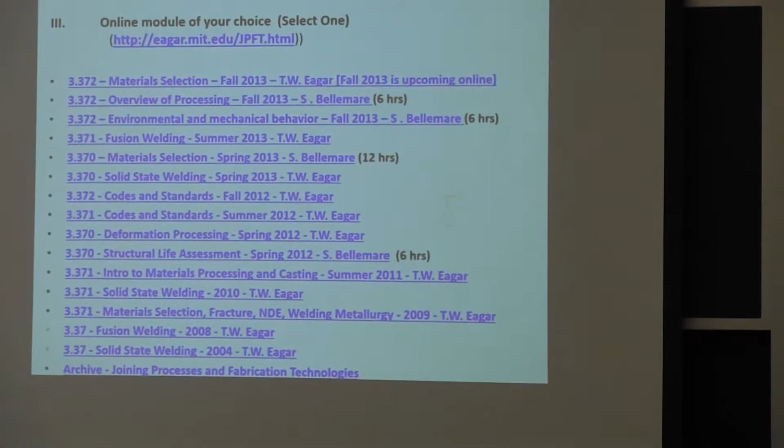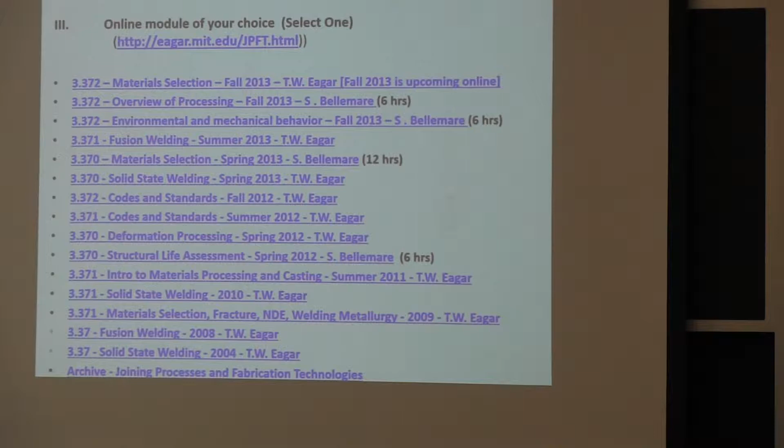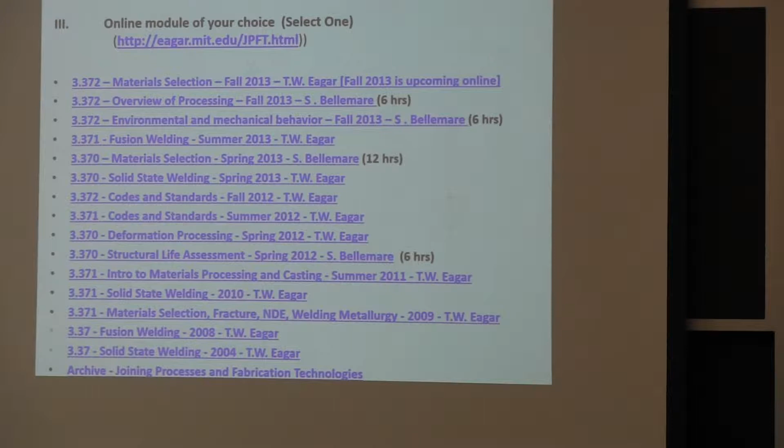I tend to focus more on what is needed as the basics in those lectures, especially the one last fall on environmental and mechanical behavior. I talked about corrosion, which a lot of students in the class really liked because it's not something that's taught so much. It's not cool to talk about corrosion, even though it's very important to practicing engineers.

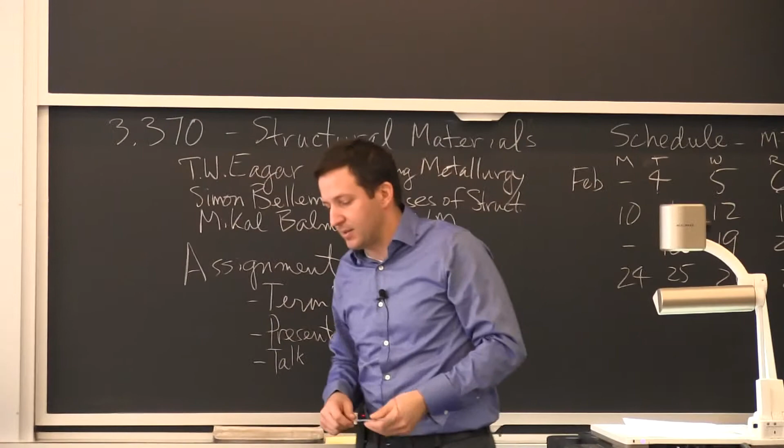And that's an extension of what Professor Eagar was saying about nanomaterials and what is taught in class in terms of going to the thermodynamic equation as opposed to how you actually get something done in terms of engineering. We are trying to bridge that gap a little bit.

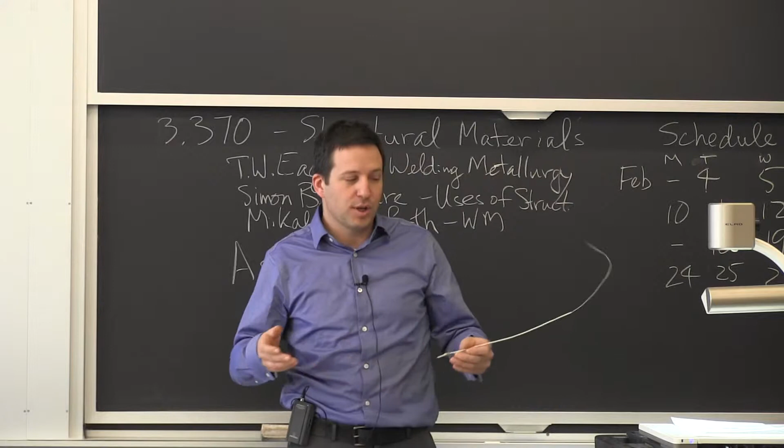A lot of it comes from experience. I have to say the first 6 months I worked for a large consulting company, I wasn't very helpful. By the time I had to turn in the assignment, I had spent so much time just learning a lot of practical stuff. And it's not that there's anything wrong with this.

I mean, I went through the process like you guys. I did a lot of research. I had a lot of basic skills. I had to learn how to apply it - it was still a very broad consulting structural engineering area, but it probably took me a few years before I was really able to answer questions without having to do a bunch of research in the first place.

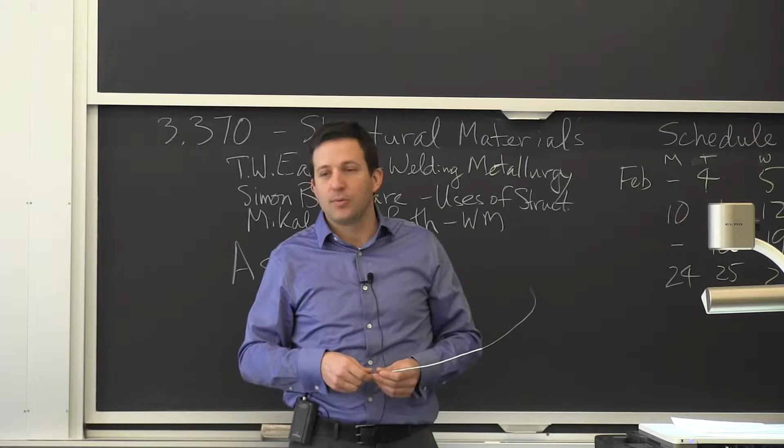We won't be able to take you away from that, but I take it to the extent that some of Professor Eagar's examples and stories help you realize that there's things we know, things we don't know. There's nothing to be shy about not knowing. The best way to learn is for someone to teach you, or to spend the time and realize that you need to get more knowledge, get more data before making a decision on a prototype or anything that you're building.

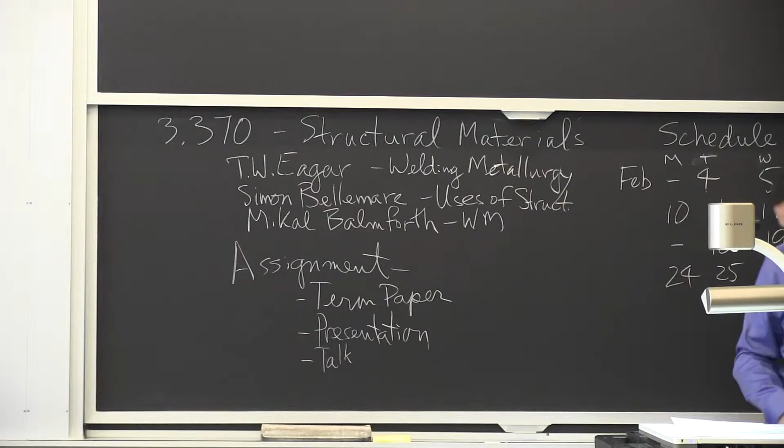So in terms of work, that was what I was going to do for overview today. If you are a practicing engineer, so if you're not in a research laboratory, a lot of times you end up having to be involved with a lot of phases of a certain project.

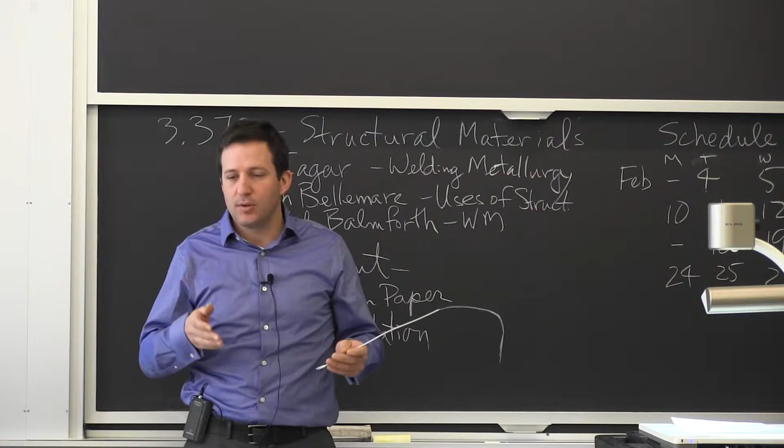Sometimes at the very beginning, you have to decide which material we're going to use. You should be thinking about how we're going to put it together. I can't tell you how many times in recent years in the class a student has come up and said, oh, I'm going to build a pressure vessel out of spring steel. Okay.

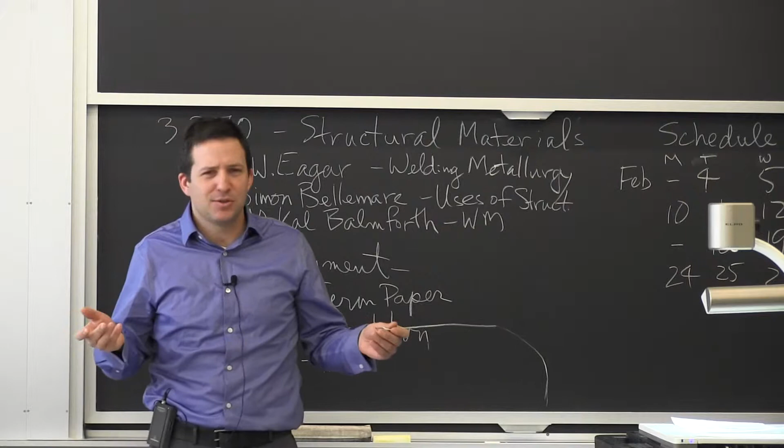Now, is your pressure vessel going to be a sphere that somehow you manufacture without any joint? And if that's not the case, you need to think about joining. It may look very simple and boring, but there's nothing more important than to think ahead.

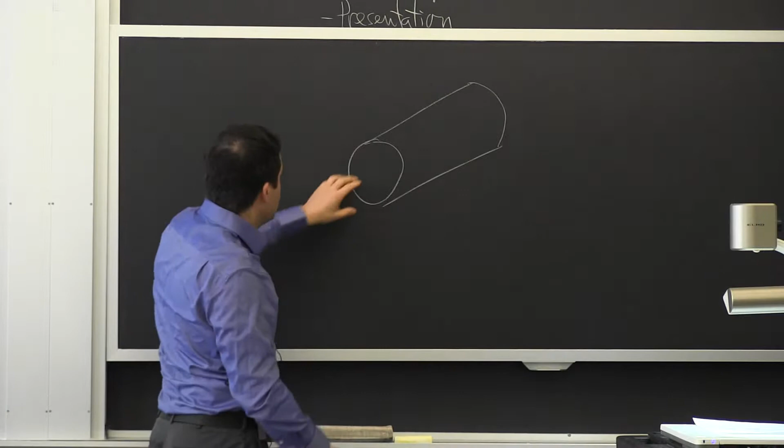If you say I'm going to do a cylinder, first of all, you need to think about these corners. They're going to try to flatten out and open. So if you put welds right there, there's going to be a lot of forces, especially if it's welded from the outside on the root of that weld. So a lot of times you want to make this half a sphere, and that way you get away from trying to open up that weld.

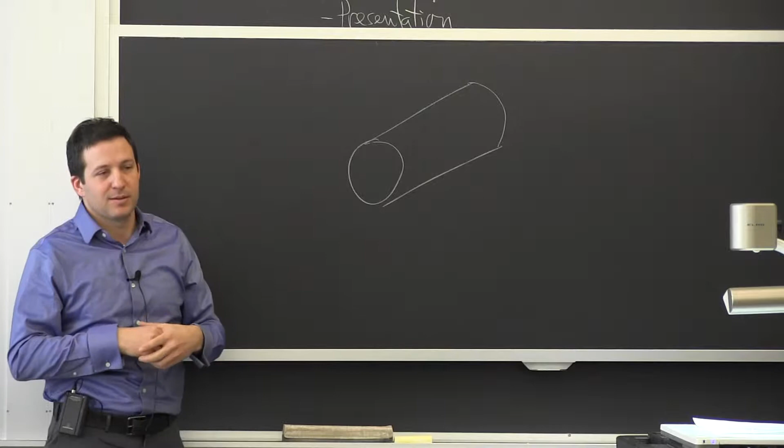And maybe you put a lap joint, like these propane tanks that you can buy at Home Depot. But you need to think about it.

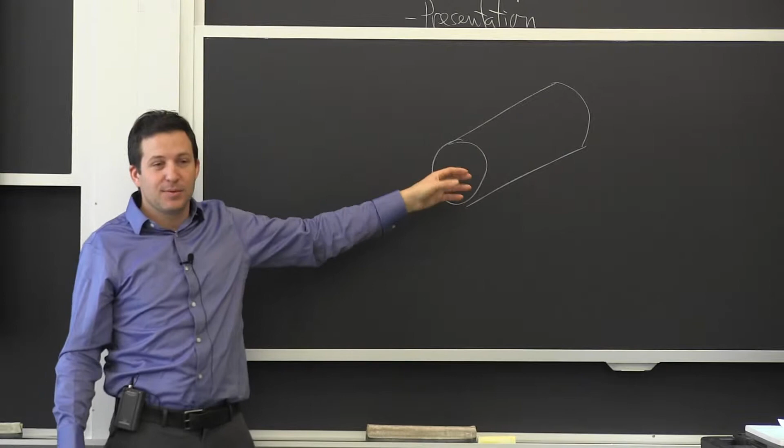And if you're thinking about using a spring steel, it limits you, because if you're going to do fusion welding, you'll learn in the metallurgy class you're going to have a lot of problem with your strength. No matter what, you'll lose. You can either lose the ductility, you can lose the strength, you will lose both probably most of the time. So you try to put these joints away.

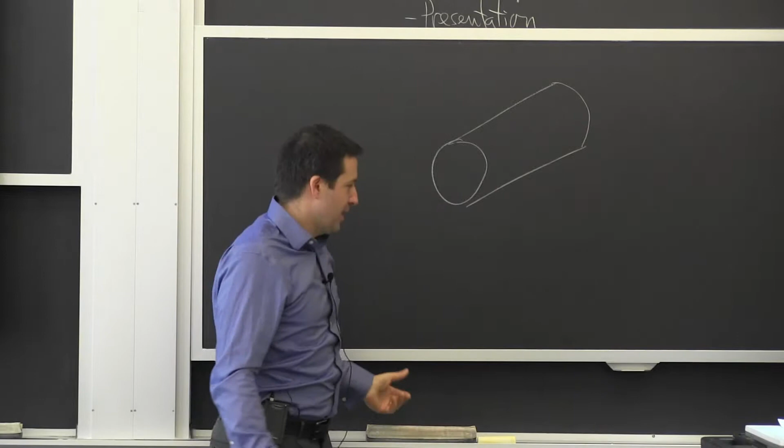Again, this is just feedback from the class. You are all smart people, but this came up 2 or 3 times over the last year - just not thinking about all of the material selection process, just thinking about trying to optimize.

Oh well, I'm going to reduce the weight, I'm going to use aluminum. And you will learn through the welding metallurgy that there are issues in terms of welding aluminum as well.

It's not that there's no easy way around it, but in terms of just being an engineer, selection of material goes with joining. And you're lucky this semester there's going to be a lot of joining discussion.

Now, I wanted to frame today's overview in terms of this design, failure analysis, and rehabilitation.

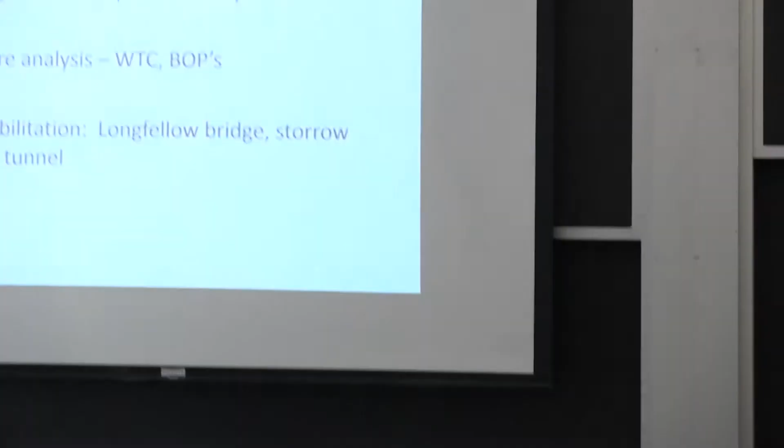This happened to be a device that is sold, and they have a good fraction of the market, the client that contacted us to work on this.

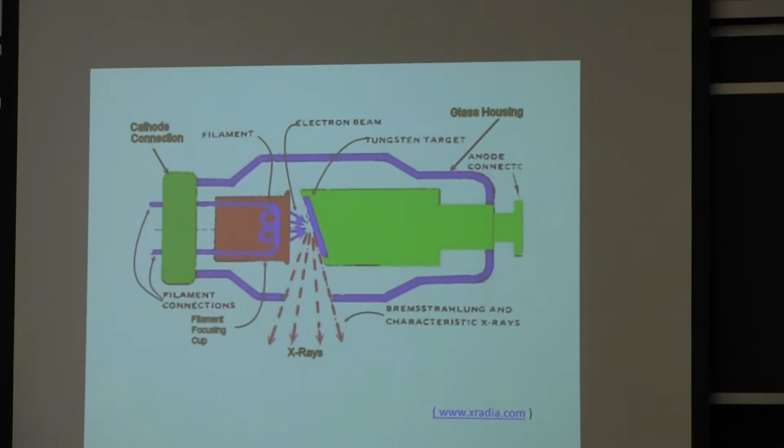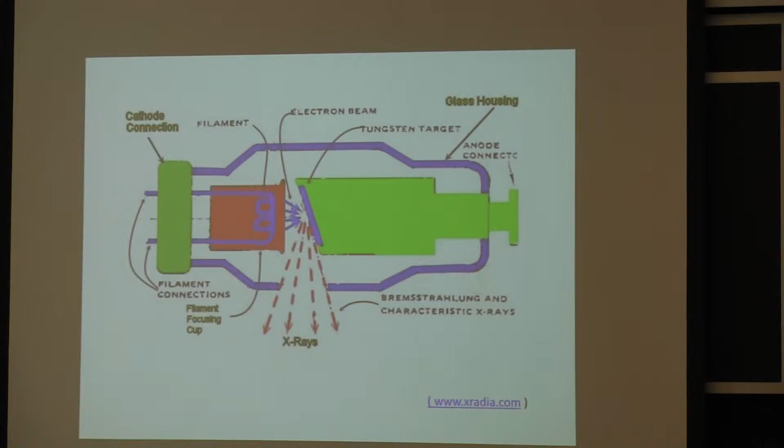Another example of recent work is these X-ray sources that are in the scanning systems at the airport. This was another project I was contacted for because they had trouble. You have the whole scanning system - you need X-rays, and this device here essentially produces the X-ray for you.

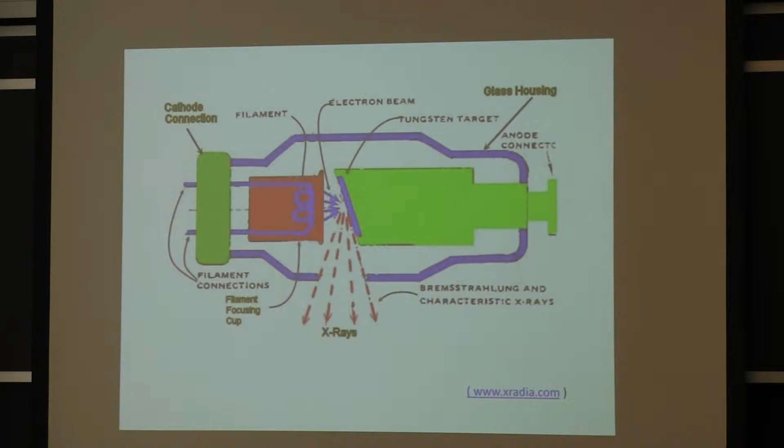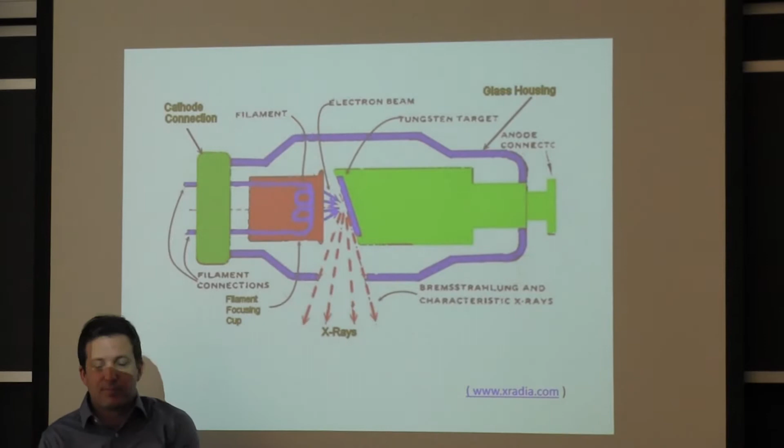It works a little bit like an electron microscope, if you've seen an SEM before, where you start with electrons and energize them. The electrons come from that filament here, and they hit the surface and produce X-rays. That's what you use to shine on the luggage, and you have detectors on the other side to find out what's going on.

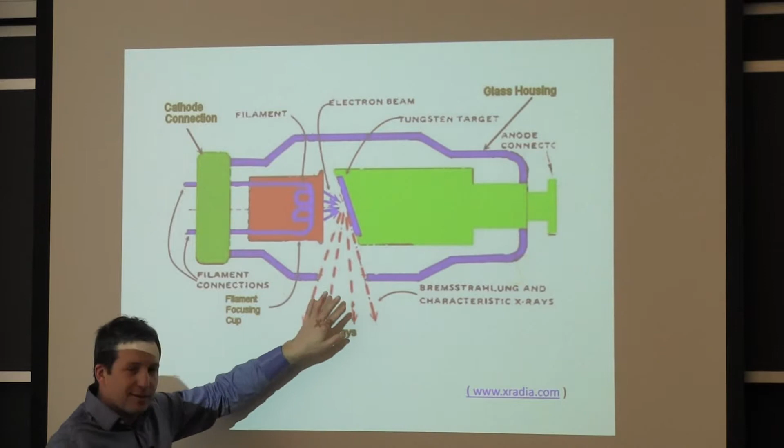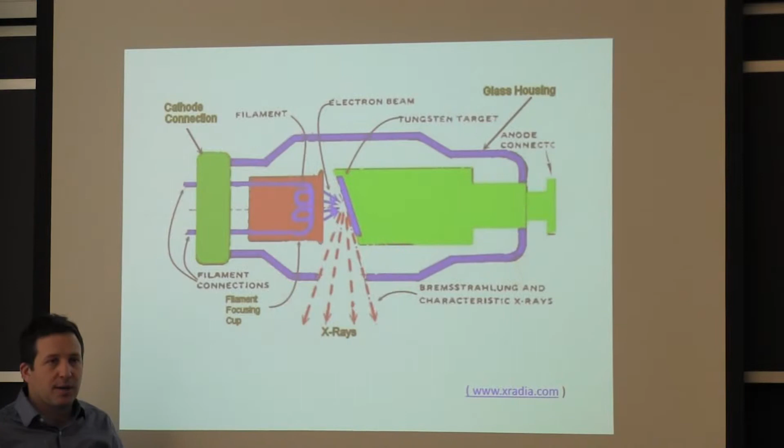The main objective for these people was trying to get as many X-rays as possible for low cost. It turns out the sources of X-ray were a lot cheaper than the detectors. So one of the technologies to improve the scanning systems is to have multiple sources scanning on a single detector.

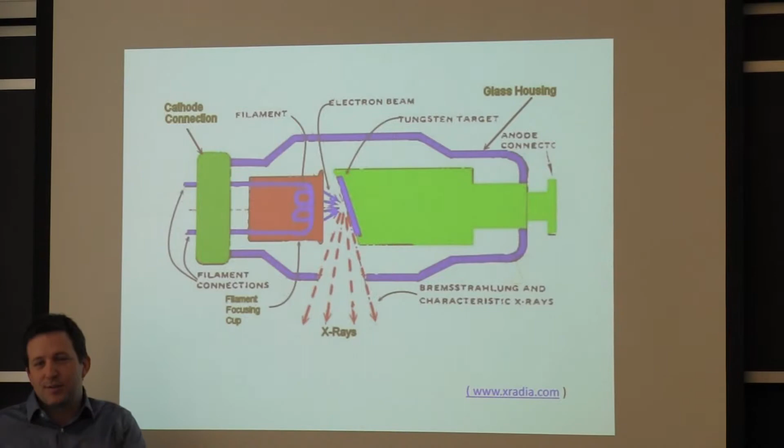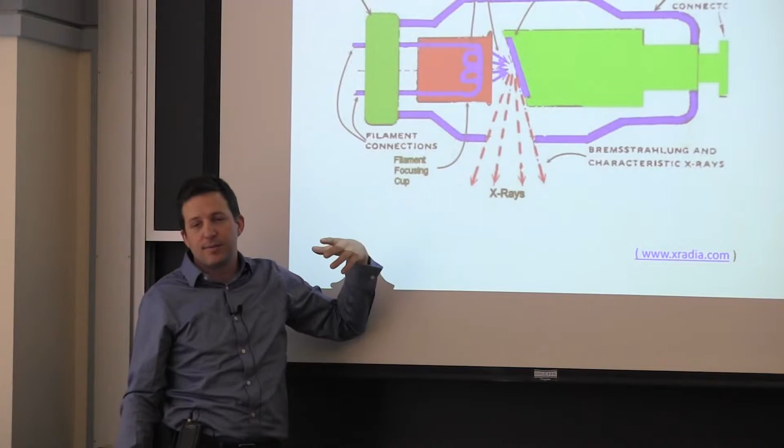If the detector is 5 times more expensive, and I can sequence it fast enough - say at 600 hertz - switching which source the X-rays are coming from, I gain a lot more information about the luggage than if I try to match one source and one detector.

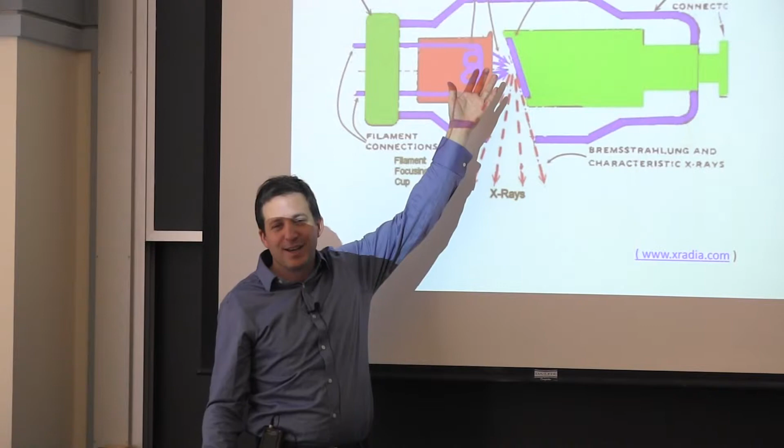The main implication of this is that at 600 hertz, this electron current was turning on and off. I had to tell them, well, maybe you just want to block it here, so you still have your source running in steady state and you don't have to worry about fatigue. This was a fatigue issue from the idea of switching the current.

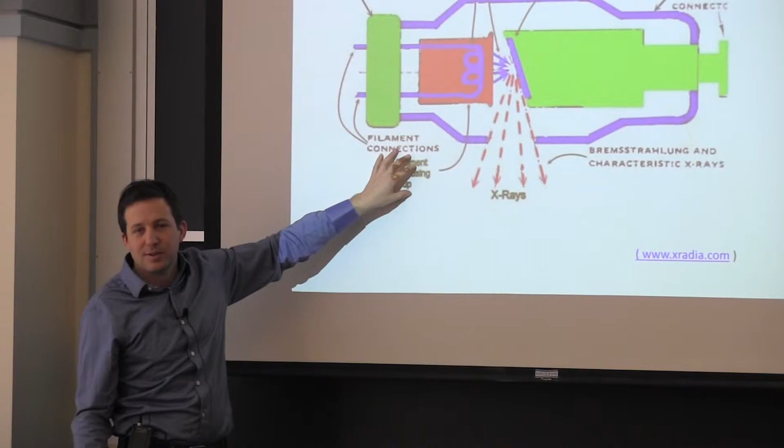The response I had on that is, well, I'm going to need more power supplies, I'm going to need a lot more current. I mean, the whole idea is you have one power supply and you flip it among different sources. First of all, you don't need to go to a 220 volt or 480 volt unit, but also in terms of hardware, it's less expensive to put together.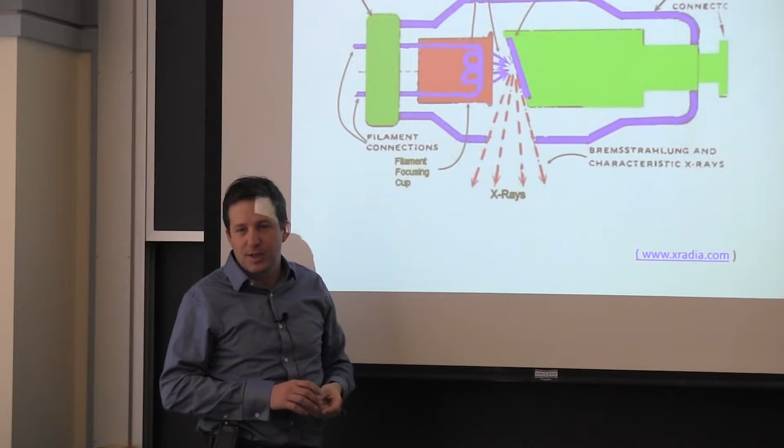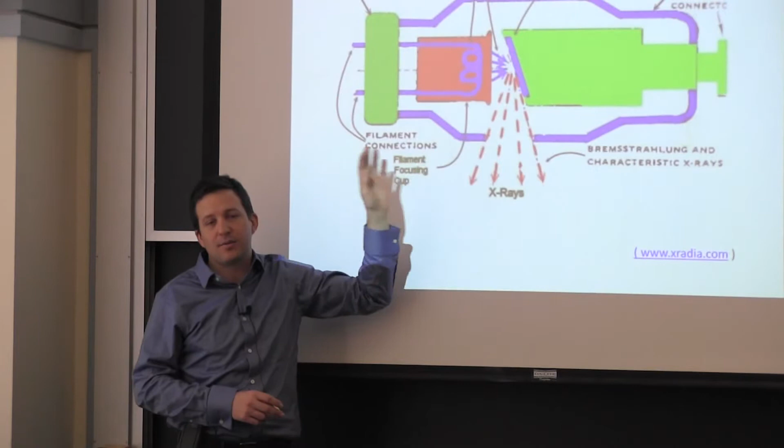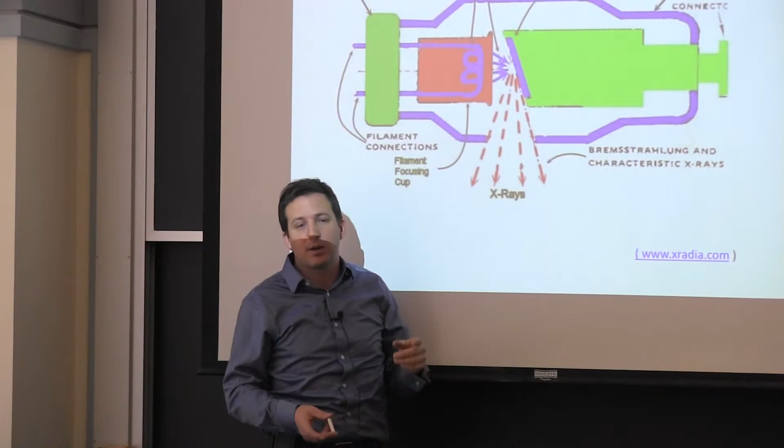So all these practical limitations essentially tell you this had to get very hot and cool off at the same frequency of turning it on and off. That's essentially what we worked on - doing the thermomechanical analysis and trying to figure out materials that would resist potentially higher temperature or higher temperature variations from turning it on and off. So the system, again, you shine here - it's a tungsten type disc.

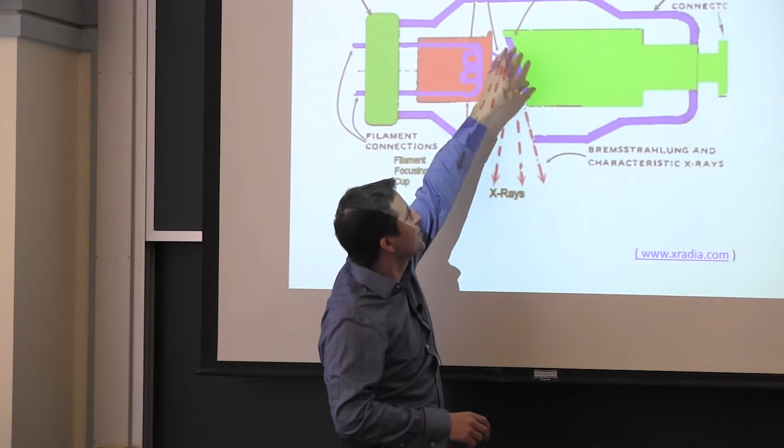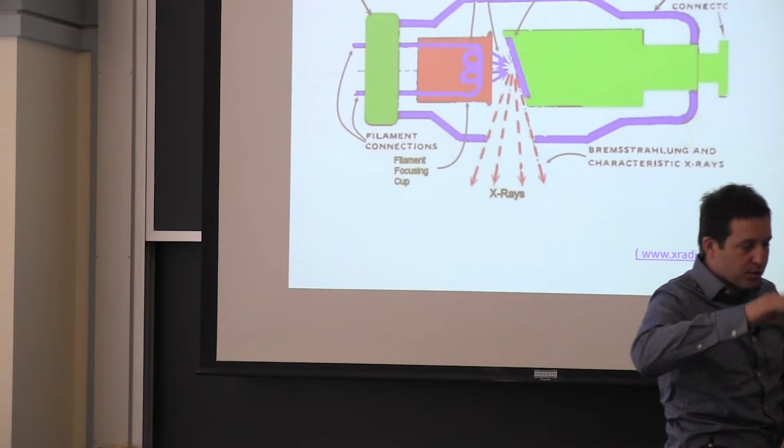There was a lot of proprietary information that they didn't even tell me about how they made it, but we had to characterize it to the extent we could to know if it will crack or not when it goes through these thermal cycles. So it's just a practical example.

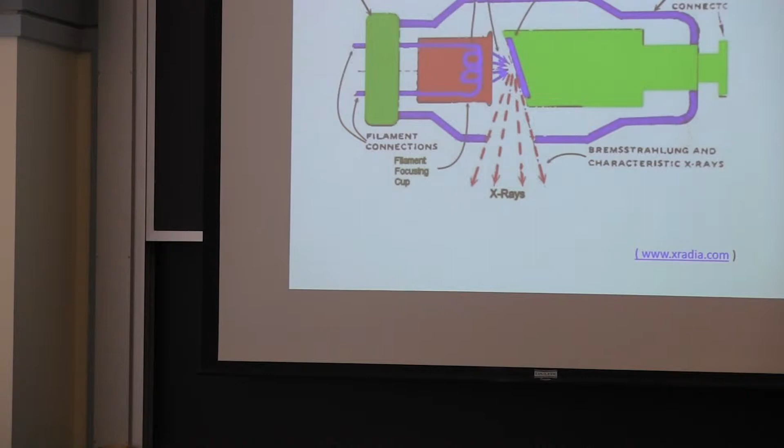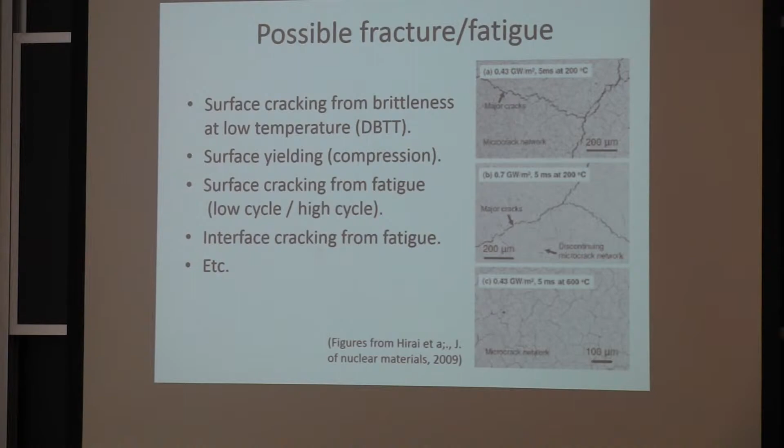If you start with a flat surface and you break it down a little bit into smaller pieces, you can still use it as a source. One of the problems is some of the cracks were bifurcating, and then you lost your thermal conductivity, and you started almost melting the tungsten on the surface because it didn't have the heat path to go from tungsten to some form of copper to a cooling fluid. So this idea of the cracks turning on them was one of the big issues.

It's not uncommon for materials to have a lower resistance to cracking in the rolling plane, in the plane where it's formed, because the inclusions get flattened, and you essentially have paths of low bonding energy. If the crack is coming down and it hits a bunch of precipitate or inclusion, it will turn, especially if there are also shear stresses from the thermal gradient that allow for that to happen.

The World Trade Center is something Professor Eagar wrote a very nice paper on. I decided to bring it up just to show a little bit that there's something to be learned from doing this failure analysis. It was a terrible catastrophe, and there's nothing to be done about it. I mean, the building is gone, the people died or were injured, and it's the end of it. There won't be another World Trade Center, although, is the Liberty Tower completely up, or are they still working on it?

Yeah, I worked on the foundation welding. They had issues. It's going to be strong, but when you oversize your design, there are things that normally are not any issue that now all of a sudden you have to worry about. You put more braces, and now they meet with each other. You have more thermal expansion trouble if you have redundancy in your system. There's a lot of issues.

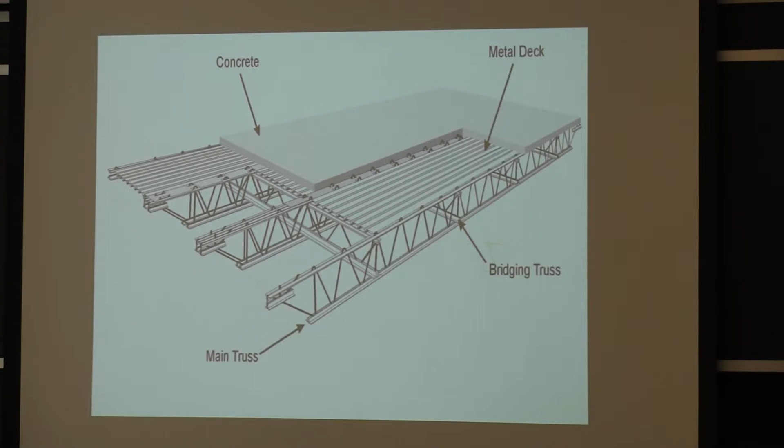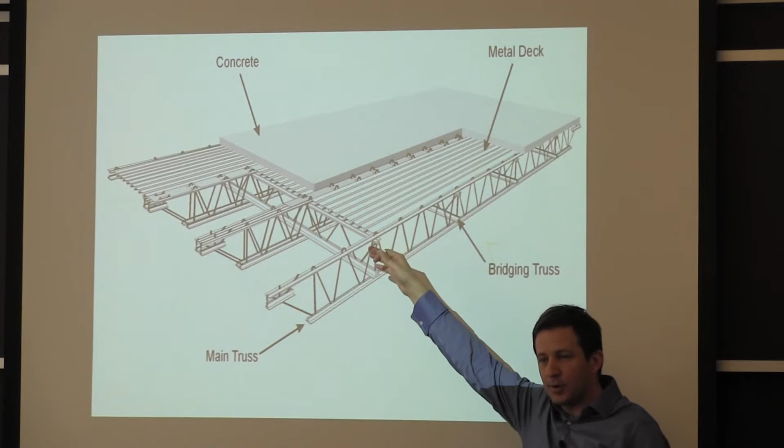The reason why some people say it caved in is these floor trusses or joists are, first of all, very thin metal. They're holding a lot of dead weight, and therefore they will heat up very quickly and sag. So if you have a truss that starts to sag, it pulls on the main columns. That's one of the theories.

Now, what does it mean? Well, if you wanted to gain 10, 15 minutes of life on this whole tower, insulate these floor trusses or make them such that they'll come apart and you lose one floor or something, but the whole building, the main columns won't start to buckle essentially.

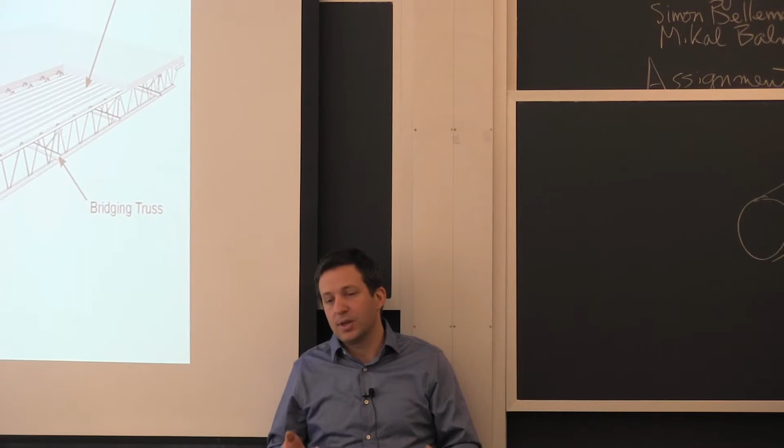So it's this idea that, yeah, you want to insulate the metal, and probably you want to insulate the main columns. But if at the end of the day what ended up being the trigger is this pulling action that creates the buckle, then you need to prevent that either by not using steel. You could use concrete, pre-stressed concrete for your floor support, or insulate it, or make it such that it will disconnect when it reaches a certain temperature or capacity without creating too much pulling action.

So that's, I guess, my one example. If you're going home tonight and say, why do these guys do failure analysis? It's just to fight over who made the mistake and that kind of thing — and not always. Sometimes it is, sometimes there are lessons to be learned for future design. They changed a lot of the fire protection building code based on these studies.

Now, blowout preventer, we're not going to have time, but I will talk to you guys about blowout preventers. I actually brought a piece right here, and maybe we could do it.

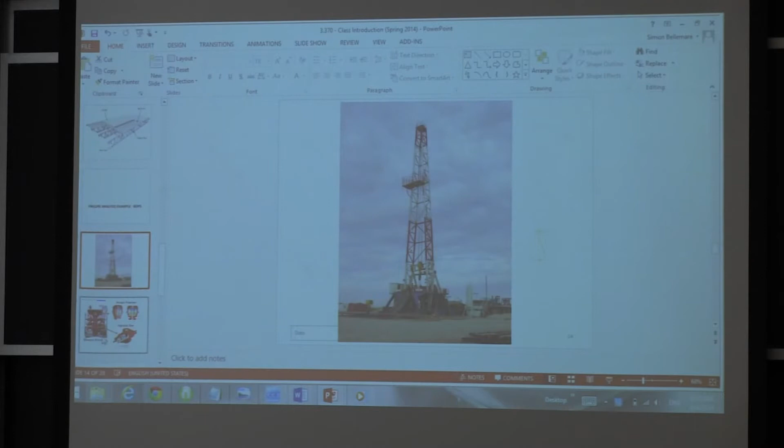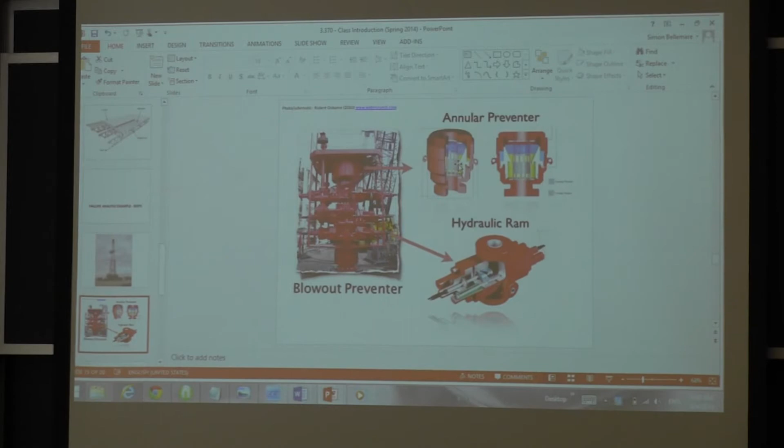I was lucky enough to work on the big spill, the BP. This is a very simple packer system, and what you do, I'll show in a video. It's a little heavy, but it can be turned around. What happens with these systems is you want to be able to shut the well when there's a drill string in the hole. And there are multiple ways to do that. One of them is to use sort of a donut that will come out of the housing of the well, and press all around against the tubing.

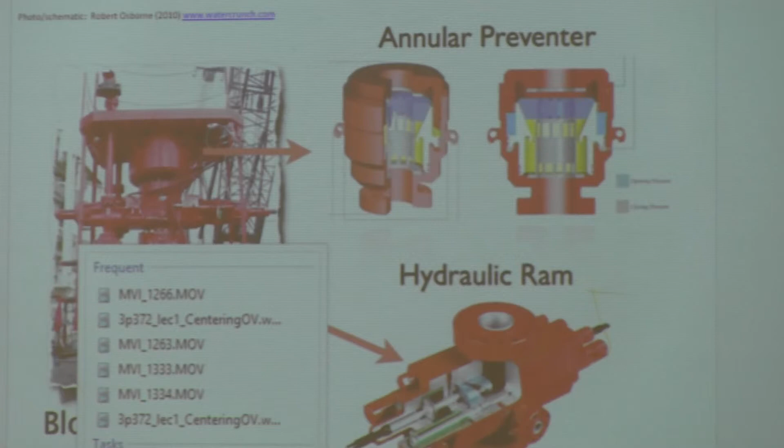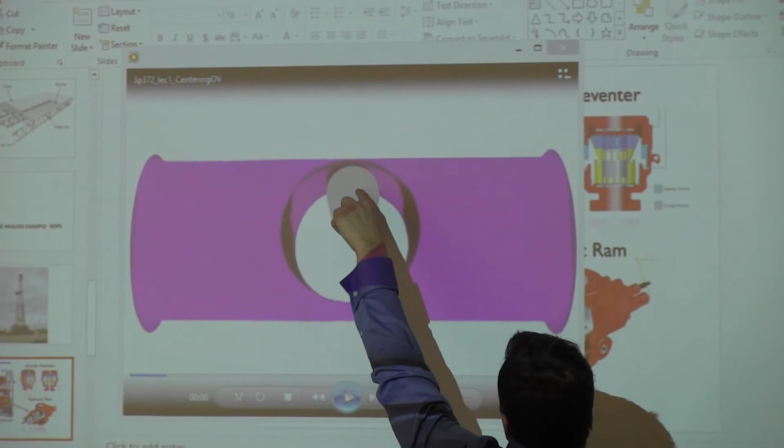So this goes up and down, and what happens is you have the drilling mud or your production coming through that tubing that's inside the well. And this, you're talking about something that's as much as 3/4 of an inch thick, maybe 3/8 in general. So one of the things that happened with the BP spill is they had some knives to try to get that pipe out of the way, but it wasn't sharp enough at the right location, so they were not able to completely go through that drill string.

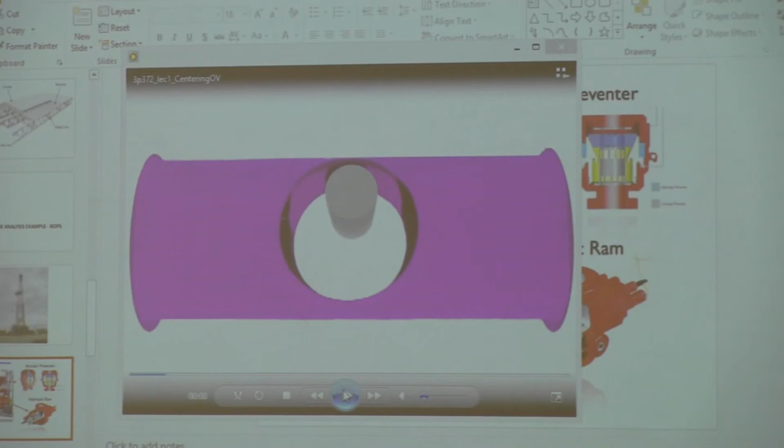But you can see that as being a challenge if what you want is a valve, okay? But if you want a valve to resist 10,000 psi pressure, which is about 100 times or more what you have in house plumbing, you need a lot of metal to hold the rubber. So if you look at this here, what we're working on is making a rubber seal between the packer, the piece that you have, and the drill string right here. And you also need to make a rubber seal against the cavity around it.

It's really not an easy process if there's flow in the well. If you have drilling mud that has all the little particles from drilling, it's very, very abrasive. So there's no doubt that it's a challenging environment to be designing something.

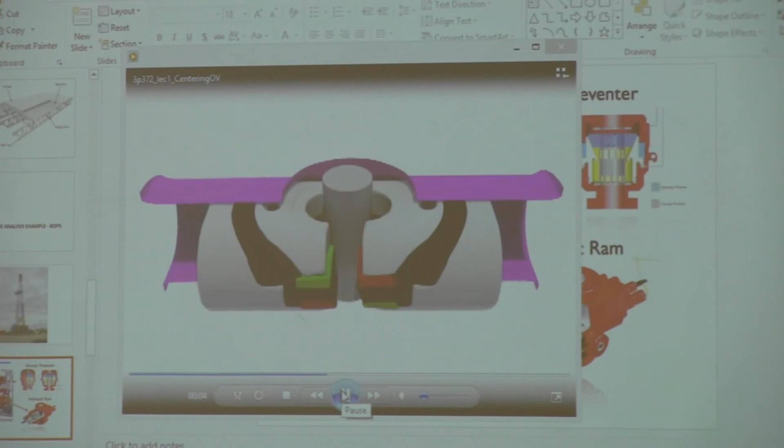At the same time, it is important. If people call it a blowout preventer, they expect that when there's some pressure rise in the well, they'll be able to seal it. It's an example that involves a lot of environmental factors. You can have H2S in some of these wells. So if you have steel, you have to be careful about residual stresses, hardness level. If you have rubber, the rubber also will deteriorate under certain gas environments. So there's a lot of material selection, wear, and just basic design that is involved in this.

Now, exactly what was learned, because that's another example of failure analysis, I think a lot of people did learn to some extent that they needed to not consider these foolproof, because they didn't work all the time. So whether they're going to change regulation, or whether it still becomes a responsibility of the designer to make these reliable, is still an open question, I think, even 2 or 3 years down the road. Because there are some specifications on how to make these, but they're not very detailed.